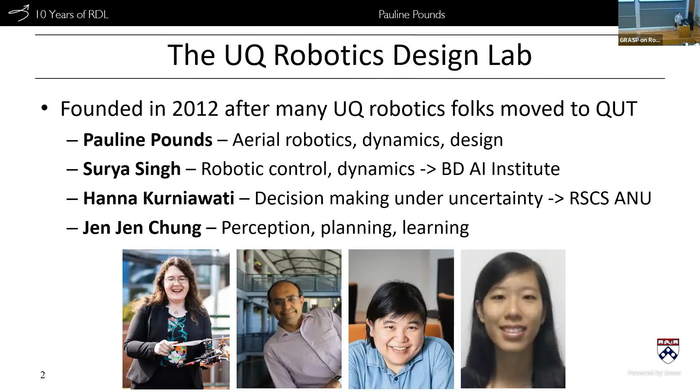So in fact, I'm one of a few people who are members of the UQ Robotics Design Lab. We were founded back in 2012 after a whole bunch of robotics folks left to start a new lab at QUT. And when a great oak falls in the forest, smaller trees may spring up in their place. So Surya Singh and I started our group, and then we added Hanna to our ranks. Surya is doing amazing stuff in robotics control - in fact, he's so amazing he's been poached and he's now at BDAI, gone to the promised land. Hanna has gone on to RSCS at ANU, where her work in decision-making under uncertainty is very much appreciated. And Jen Jen Chung, formerly of ETH Zurich, has just joined us, bringing us back up to something looking like full strength.

So I'm the aerial robotics side of UQ RDL, and we look at practical whole systems approaches towards robotics design. We look at UAVs, sensors, walking machines, industrial applications - lots of different places where we can use our special little set of toolbox. Our toolbox is mechatronics, dynamics, and control, and not CS. So if you're looking for an algorithm, I'm sorry, I can't help you - I'm terrified of anything with an operating system. But if you're interested in dynamics, control, and mechanical systems, oh boy, that's what I'm all about. So here's a little grab bag - some of these you'll see today and other ones will remain conspicuously elusive.

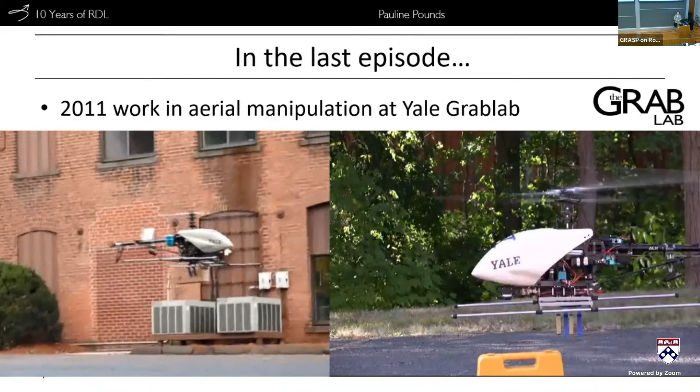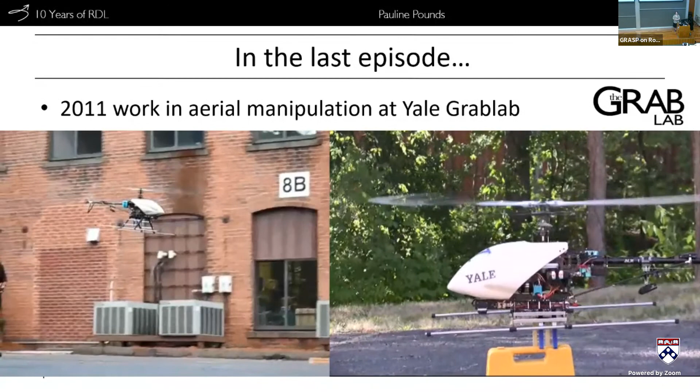So when last I came and visited - this one hasn't quite put the video through properly, I might actually reshare the screen - oh no, it's picked up. So when last I visited Grasp Lab 10 years ago, I was showing off some work we'd done at the similarly named Grab Lab at Yale, where we did some of the foundational work on aerial manipulation. I very much enjoyed this work because it had a clear practical application to underlying theory that relied entirely on clever mechanical interactions rather than on high-speed, very efficient algorithms or the robot thinking too much about what it was doing. This sort of set the pathway for where we went in the future. So if you haven't seen it before, go check it out.

It is kind of cool. The very first object delivered by a hovering drone, by the way, was a can of Guinness. So I think that says a lot about our work in philosophy.

So what do we care about aside from cans of Guinness? Making drones cheaper—we want our drones to be low cost, so cheap that we can even throw them away when we're done with them. We want to make drones better: fly longer, further, carrying heavier payloads, and just generally being more capable.

We want to make our drones safer. We want them to be able to reject wind gusts and perhaps sense obstacles around them—and a brief detour into stopping humans from being cut to ribbons by them as well.

And we want to make dynamical bipeds affordable. This is a new branch for us. It's kind of odd to work on something that doesn't fly, but actually a lot of the principles are very similar. My stratagem is to radically rethink and reframe problems to find electromechanical, what I call stupid or dumb solutions, instead of CS-based smart solutions. Not only because I'm not that great at CS, but because there are many benefits from going for a hardware-centric solution.

They're simpler, they're cheaper, they're faster. In terms of response time, there's no sampling involved. They'll involve fewer parts, and what's not to love? Anything you can do to make your system more practical and employable, the better off you'll be.

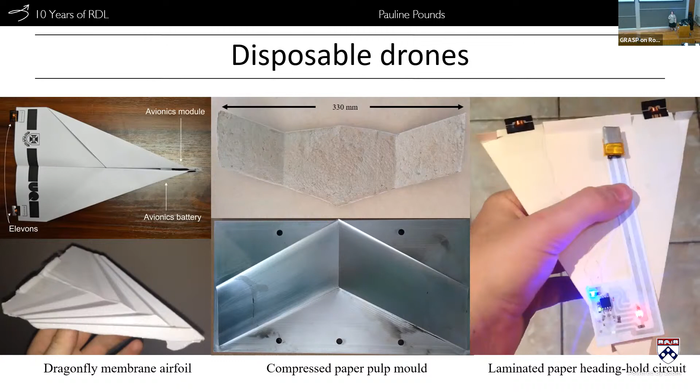But after building these paper planes, and this is sort of about the first couple of months while I was at UQ, I realized, what are they actually good for? And it was around this time that, as it does, Australia caught fire.

You may have noticed the smoke around campus. I have carefully arranged this to act as a counterpoint to this talk, so you could appreciate the challenges faced with trying to actually measure things inside a bushfire and dealing with the consequences of wildfires, for example, up in Canada. It's not enough to have a single drone flying around—a $10,000 drone could be in one place at one time taking one measurement.

Whereas if you can have 10,000 one-dollar drones, they can be everywhere all at once, giving you measurements constantly. So our rationale was, if we can build drones this cheap, maybe we can build drones for bushfire fighting that will actually help save lives and prevent losses of property in circumstances like this.

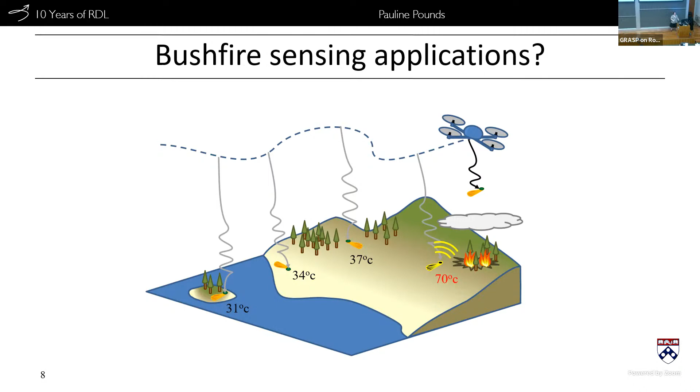So we thought about it and we realized, well, paper's challenging to deal with. Let's roll back a little bit and just go to polyimide. Polyimide is actually a really good material for making disposable drones from. It's light, it's cheap, and it's intrinsically part of the existing circuit manufacturing process. Flexible circuits are inside all of the cell phones, all of the cameras, all the laptops that we have on us every day of the year. We build hundreds, thousands of tons of these annually worldwide.

So if we can build a circuit into it, can we make a circuit act as a wing? We thought, well, what's the simplest wing we can build? And we thought, how about a samara seed? Maple trees grow natively on UQ's campus, so I tripped over one while going to work one day and thought, oh yeah, I'll build one of them.

So we built the system. It's designed to be a one-part UAV, fully automatically assembled by a machine. On board, it has a pressure sensor, humidity sensor, an ambient light sensor, a temperature sensor, as well as a 6-DoF IMU, so you can measure its motions as it falls, and then a radio module on the back.

The trick to making these things small and cheap and highly integrated is to make every part do multiple things. For instance, that leading edge stiffener is also a counterweight, which provides stability of the aircraft as it auto-rotates. It's also connected to a radiating element, which forms part of the antenna for the system. In fact, it has three separate antenna axes, so whichever way it lands, there's always a radiating element pointing up. The radio is on the back of that little circular green part with all the circuits on it.

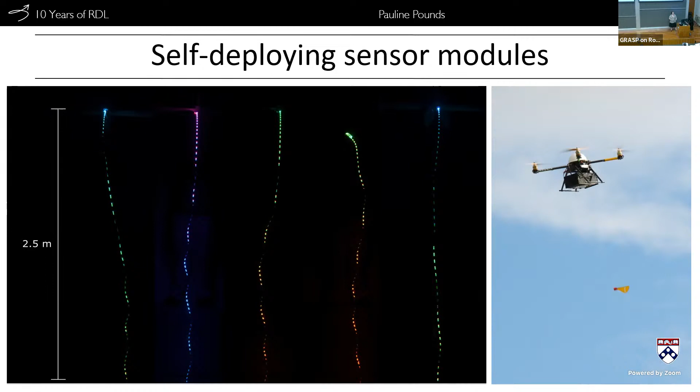Before we actually took it to the field, though, we did a couple of quick tests. If you put glowy lights on it, you can get measurements about how fast you're falling and how fast you're spinning. This told us that we reduced our terminal velocity on hitting the ground from about 16 meters per second to about 5 meters per second, and we spin at about 10 hertz according to our strobes.

Alright, so here's a view from our drone. You can see them flying down. You can optically track them if you know what to look for, and you can build a little system that will cue in on your red colored bits of tape. Sometimes it's a bit hard to see, but on a good day, you can track them all the way from the aircraft to the ground.

That's kind of neat, because if you know where you launch them from and you know where they land, you can calculate what the wind speed is at each point in its descent. One of the problems of building a device that's biomimetic is that when you try to find these things after the experiment, they just look like leaves amongst all the other leaves. So I recommend if you ever replicate work like this, paint them bright pink. You'll save yourself so much suffering.

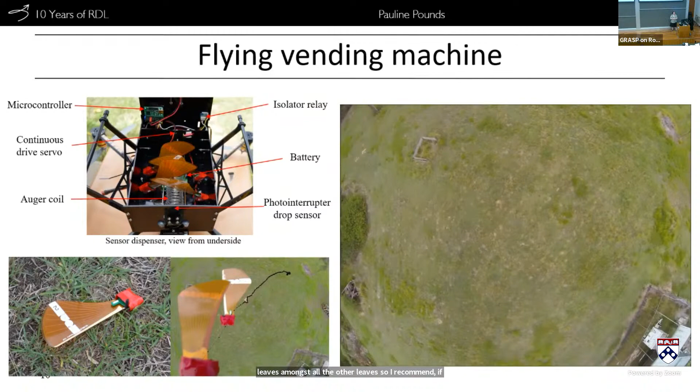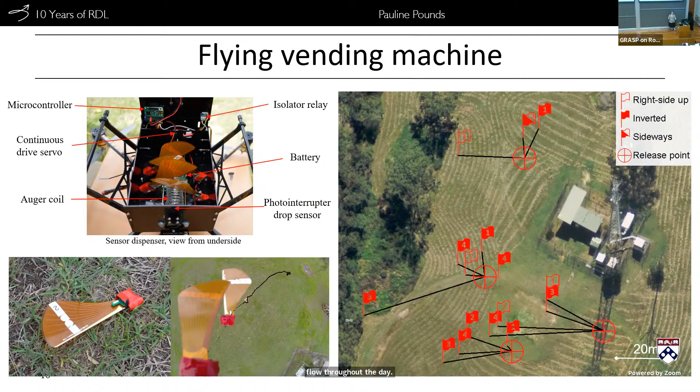Once you do this a whole bunch and collect a bunch of data, you're able to build up things like topographical maps of temperature, topographical maps of pressure, but also changing wind flow throughout the day. This is a subsample of our data showing that when we drop it from 4 different locations, 4 different times in a row, the wind has started to change its track throughout the course of the experiment.

It's not just enough to build something that auto-rotates. If you have an aircraft with onboard sensing, you might as well use it to do something more interesting. Since we have this foldable substrate, and we'd already done experiments with paper airplanes, why don't we extend that to the circuit board environment as well?

So we started folding our circuit boards into 3-dimensional aerodynamic shapes. For this orange one, we just stuck with the delta dart because that's understandable to people who know what that is and what it looks like. But you can do all sorts of interesting things like providing corrugated stiffening, forming airfoil shapes, and integrating your circuitry directly into the structure of the aircraft itself.

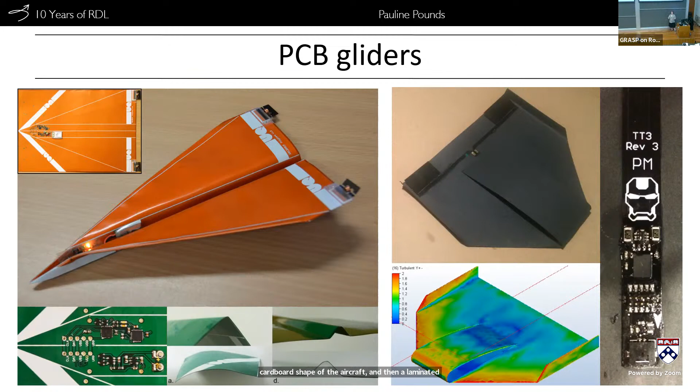Here we've used a combination of these two bits of work, where we have a piece of paper which forms the cardboard shape of the aircraft, and then a laminated circuit out of the polyimide which gets glued on. This combination keeps the cost really low but gives you the best of both worlds.

Where do we want to go with this eventually? If you can launch these from something like a helium balloon, you could get up to 30 kilometers in altitude. And after free falling for about 10 of those kilometers, you get a pretty good clip, so you could fly for quite a long distance with a glider optimized to have a decent glide ratio.

But the problem is, what do you do when you're up there? You have wind, you have potential disturbances. If you have a good enough tropospheric map, we want to build a system that does offline planning, giving our system a series of decoupled wavelet functions that allows it to calculate what the ideal heading would be to take it where it wants to go, no matter where it ends up in its flight path, given an almanac of future weather conditions pre-computed using Bureau of Meteorology data.

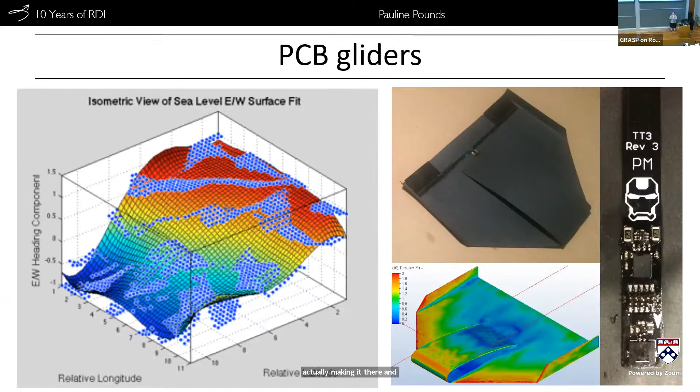This one's still in the works, but it looks promising at this point. The idea is that with very little information encoded into a tiny microcontroller the size of your pinky finger, you'll be able to have something that can navigate long distances with a moderate chance of actually making it there. And even if only one does, they're cheap enough that you could launch swarms of tens of thousands and still carry out your mission.

Okay, so let's move on a little bit to drone performance. We've gone from cheap, let's go to good, or at least better. Can we fly with useful loads for longer and further? How would we go about doing that?

One of the biggest challenges I have as a helicopter aerodynamicist by training is that helicopters are very efficient, but they're hella complex. They have these swash plate mechanisms with all these moving parts that have to be lubricated and assembled correctly, and some guy forgets a washer and suddenly it tears itself apart right in the middle of doing something interesting. It's a bad look.

Drones rule the world today. Quadrotors rule the world because they have 4 moving parts. Once upon a time, people thought they'd be more efficient or more maneuverable, or this or that. No. Actually, they're terrible aircraft compared to helicopters and things like helicopters, but they're so simple. And that really made an impression on me when I realized it.

What I would like to do is build something that is as efficient as a helicopter, but as simple as a drone. How do we go about doing that?

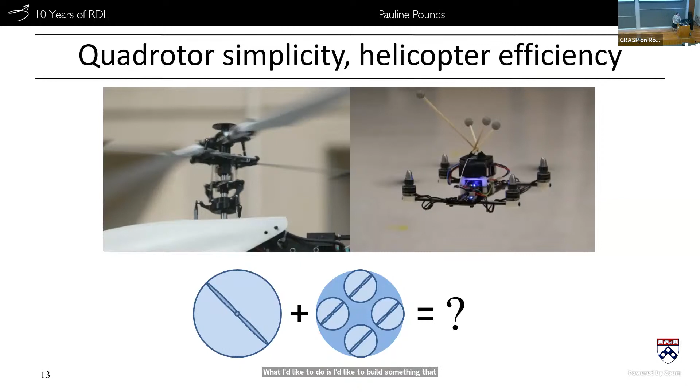Well, we thought, okay, a helicopter has one big spinning thing that provides all the lift, and it's more efficient because it captures a larger cross-section of area and can waft it down more gently than a quadrotor with 4 small thrusters that have to grab air and push it down very quickly to get the same amount of momentum transfer. Because kinetic energy is proportional to velocity squared, you're going to need more power in order to do that.

So if we just have one big rotor, that's great, but how do we get past the swash plate problem? Well, quadrotors use sets of rotors to maneuver by applying direct torque through their thrust, so why don't we do the same thing? We can use a tripod arrangement so that we can provide roll and pitch, and then have another axis with a slight cant to the side, which provides yaw.

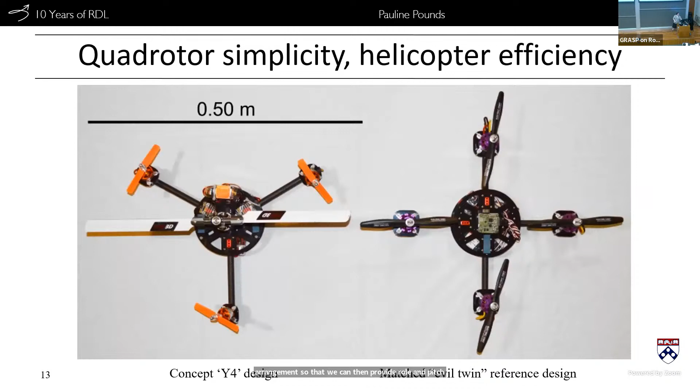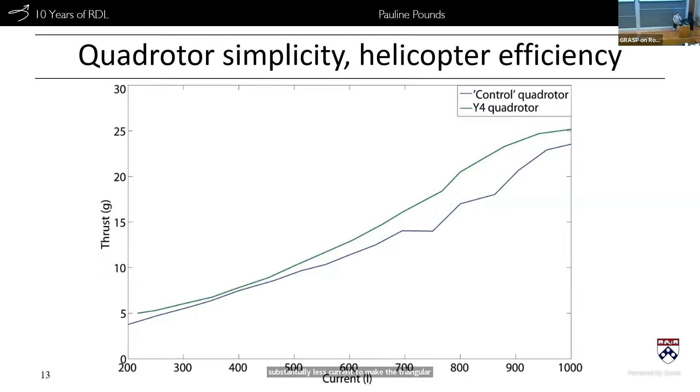If you put these on a thrust cell and just fly them on the ground on a bench, you can see that for the same amount of thrust, you're using substantially less current to make the triangular configuration fly. But on the ground, it doesn't tell you everything. Being able to fly these things is where the proof is in the pudding. And well and truly, we find that we're using about 15% less current on our triangular quadrotor.

This is a quadrotor designed to match its evil twin. It has the same mass, same motor mass fraction, same flight controller, same ESCs, same batteries. Even the rotors on the triangular quadrotor have been tuned to exactly match the efficiencies of the rotors on the regular quadrotor's smaller rotors.

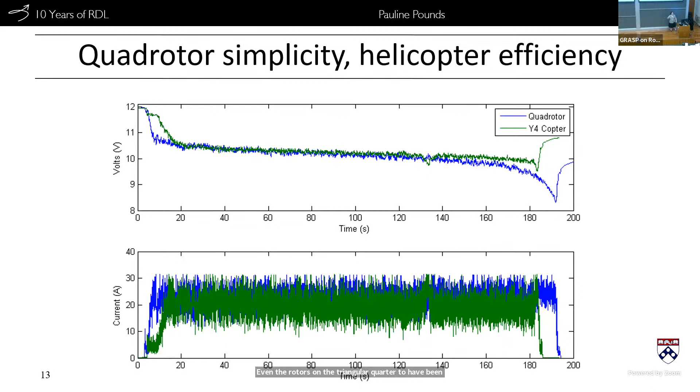So of course, it's not enough to be able to fly. You actually have to be able to control yourself.

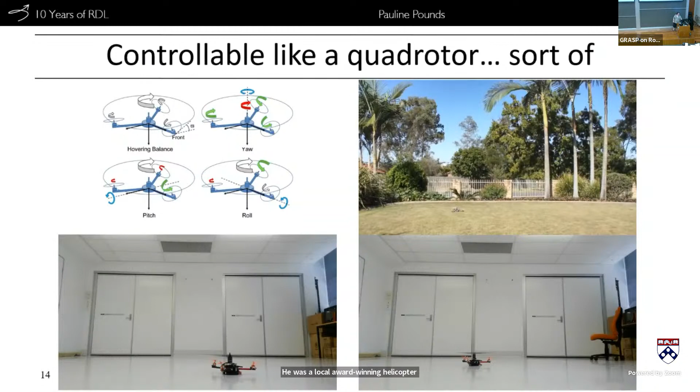This little one here on the top right is our prototype being flown by one of my students who is a champion pilot. He was a local award-winning helicopter pilot, and he had a hard time with it. His flight experience is what he would say was poor, and the flyability was not great. In fact, you can see it's all over the place, and he worked very hard to keep it in the air.

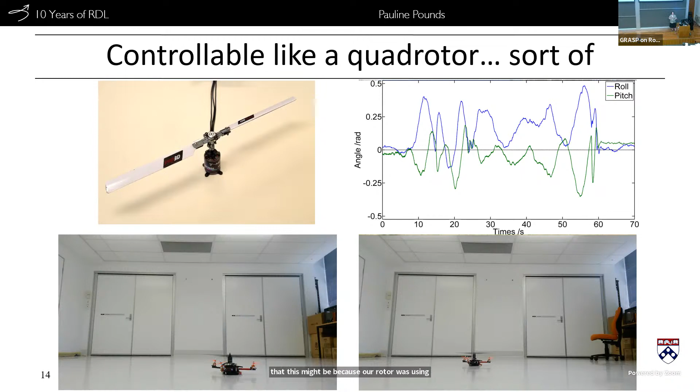We theorized that this might be because our rotor was using off-the-shelf hobby components for small helicopters that were a little bit squishy, a little bit flexible. So we said, okay, let's switch to one that's really rigid, super robust. What does that give us instead?

So here on the bottom left, we have our rigid rotor. We give it a shot, see how we go. No, that's not going to work. But when you look at the plot, that actually made us really excited, because as helicopter aerodynamicists, that has a phase lag and it's purely oscillatorily unstable.

That looks like gyroscopics. And then we realized conventional helicopters have one big rotor with a pivoting hinge in the middle. Conventional drones have pairs of rotors where the gyroscopics balance out. So we figured, if we put in that pivoting hinge that conventional helicopters have to partly decouple the rotor dynamics from their airframe mechanics, maybe that will work for us.

And what we found is that, in fact, yes, that worked quite well. This is the easiest to fly aircraft we have in our entire lab because the gyroscopics now works for you as a stabilizing reference. Even I can fly it with my 2 left thumbs, and we use it for demos for visitors all the time. Very happy with how that one turned out.

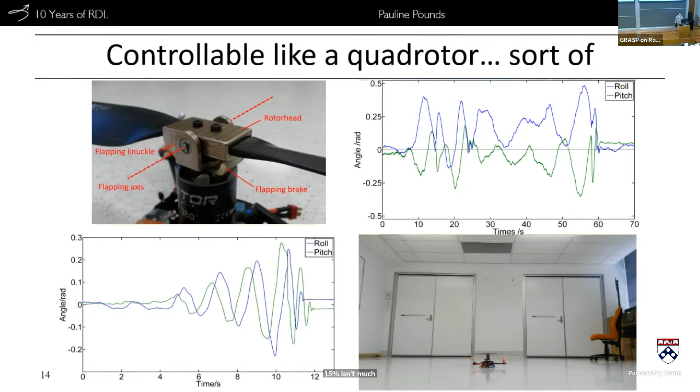But it's not just enough to build something a little bit more efficient. 15% isn't much. That one land, there we go. All right, and that result looked pretty good.

If you can save a little bit of thrust, you can start applying optimizations. With a larger rotor, you have a larger chord length. With a larger chord length, you have a higher Reynolds number. With a higher Reynolds number, you have a higher ratio between the inertial flow energy and the viscous flow energy. That means you get a more efficient airfoil for providing thrust relative to the amount of drag that you're generating.

If you can use lower power as a result of that, you can spin your rotor at a lower speed. If you can spin your rotor at a lower speed, you're reducing your drag and the amount of power you're spending. If you're reducing your overall power more, maybe you can move to a different battery chemistry that has a higher energy density and a bit more fragility, so you can't use it in a conventional drone. And since we've thrown away one of the arms of our rotor, our airframe is lighter, so maybe we can make them very thin, very long, and have very small rotors out at the side just to provide the control moments, because all the lifting's being done by the centralized rotor.

And it gets better and better and better and better. You pack everything under that motor, exactly match the motor to the rotor you're driving, and suddenly it gets better and better and better until you get an outcome of about 43 minutes endurance while still carrying a 200-gram payload. For comparison, at the time we were developing this, the DJI M100 was still being produced, and it was a 2-kilo aircraft with a 200-gram payload, which flew for 33 minutes.

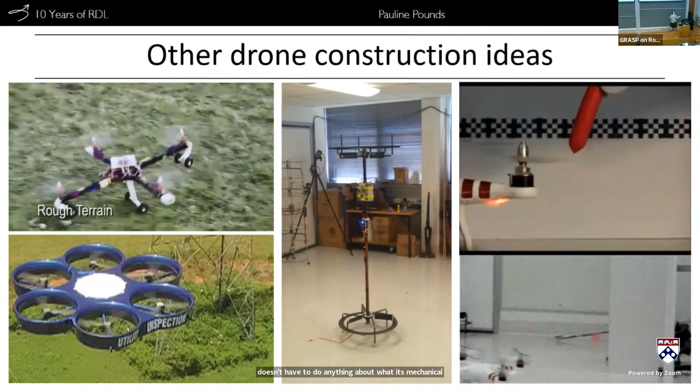But we don't necessarily have to fly everywhere. Alternatively, we could roll. So this little guy here uses what's effectively a skateboard steering arrangement to allow it to scoot along the ground using the same control mixing as what's on board the flight control system. So instead of using roll to move left-right, use roll to turn left and right. The idea behind it was that the flight controller doesn't have to know anything about what its mechanical arrangement is, you bolt it straight on. And it can even handle rough terrain by providing a bit of lift and going to what we call Segway mode, doing a sort of 2-wheel stability across the ground. And of course, it can still fly.

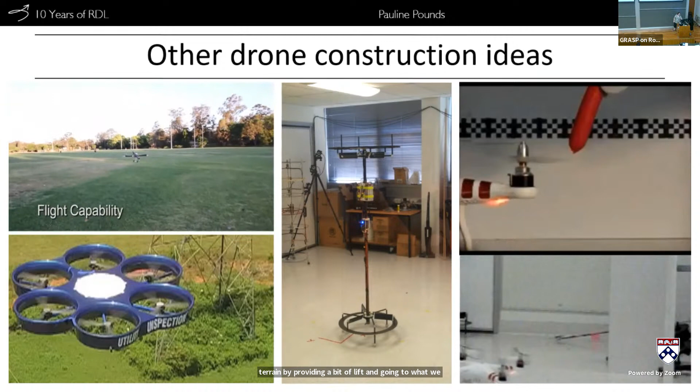At the other end of things, I'm very interested in commercializing some of my work. So I worked with a company called Alaris for a few years to build a truly ginormous aircraft. This is as wide as I am tall. It's absolutely monstrous, 25 kilograms, and carries 5 kilograms fully electric. It's totally ducted. It looks like a rendering, but it's actually real footage. We just shined it within an inch of its life with automotive wax. And we were able to meet all of our design objectives for the aircraft, but unfortunately we didn't get continued funding for it. Each aircraft was $250,000 and could take a rifle bullet through one side and out the other, because we wanted to use it for first responder applications where that kind of thing is expected to happen.

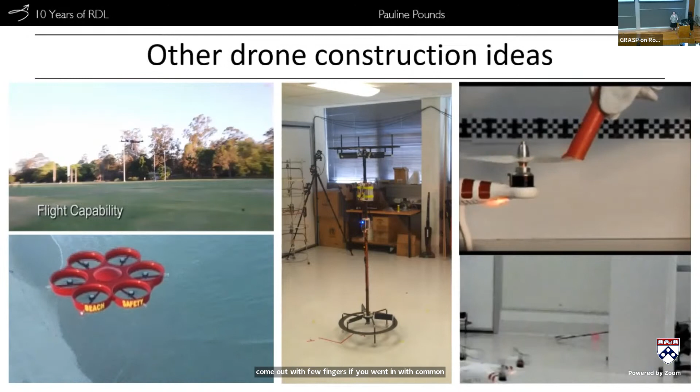Now, have you ever stuck your hand into a high-speed spinning blade of death and come out with fewer fingers than you went in with? Common problem, and unfortunately it disproportionately affects children because people think these drones are toys, when in fact they're real tools with a lot of energy. I apologize for the formatting of this video, this was done by our commercialization guys. But the idea is we have a thin plastic hoop spinning around sympathetically with the rotor, just pulled along by a little bit of friction. This acts as a sensor to detect anything coming into the proximity of the rotor. Before you get to the rotor, you have to pass the hoop. When you touch the hoop, we measure the changing speed of the system, and that allows us to say, hey, someone's about to touch my high-speed rotor. At that point, we're able to use an electrodynamic braking system to bring our rotors from maximum speed to full stop in 0.06 of a second. And you don't have to experience what that hot dog there is going through. From the moment of contact to full stop, you get 4 complete revolutions of the rotor. The idea is it turns an amputation or deep laceration into just a scratch. That's now licensed for being turned into a commercial product.

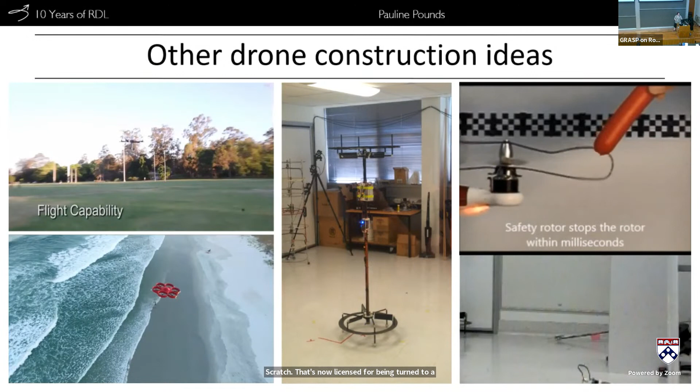All right, so switching gears again, let's talk about gust rejection. If we're flying around urban environments with our cool robots that now fly for a whole bunch longer, how do we avoid things like wind pushing us into obstacles? We don't want to collide with things.

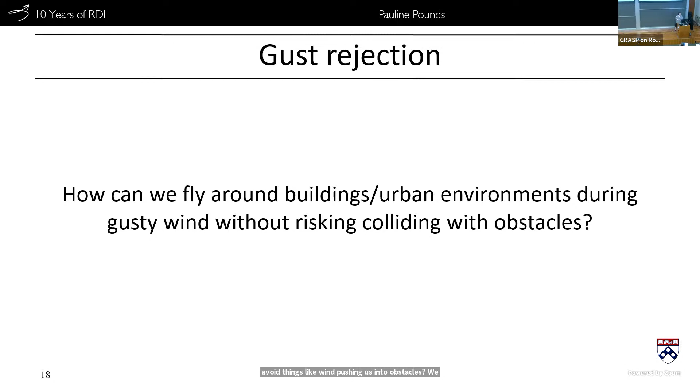We don't want to get pushed off course. So when we react to gusts, the usual way of doing this is to have a really good sensor measuring our position, having some sort of control law based on detailed models of your aircraft aerodynamics, your rigid body dynamics, maybe some measure about the wind itself if you know its nature. And then we apply computed corrections to actuators to bring us back onto the trajectory we want to be taking.

The problem with this is you have to be displaced before you can react to it. You don't actually know you're off course until you're already off course. And you can only be as good as your sensing is. If you have something like GPS, you may not have the spatial or temporal resolution to provide you any degree of security around obstacles. INS, of course, famously drifts, though RTK GPS is a good stopgap, and things like pitot tubes are completely useless at low speeds.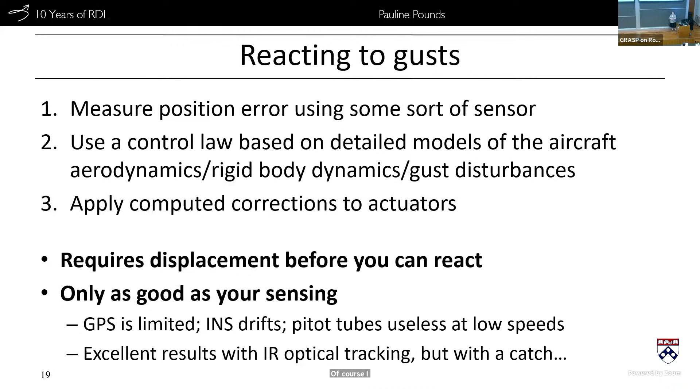Of course, IR optical tracking provides excellent results, and UPenn is very famous for their application of IR optical tracking. So I want to give a quick shout out to that. I call it the pink cheating room because early infrared emitters were picked up by cameras as a big pink glow. And it's great, it's a fantastic system, but it doesn't really work outdoors because it must compete with our old adversary, the sun. I don't know about you, but I'm still formulating my plans to defeat the sun. IR tracking is fast, it's precise, it's flexible. It's not especially cheap, but it's really easy to work with. So it's a great sensor, except we can't use it.

So what do we do instead?

Well, how about we use the aerodynamics we already have? We know that if we're flying, we must have air to work with. So if we use wind over the rotor blade moving towards the oncoming wind, which increases the amount of lift and drag, and then we use the wind across the retreating blade, which is moving away from the oncoming wind and produces less lift and less drag, to produce a total net force that we can then measure, maybe we can use that as a sensor because that's linearly connected to our drag thrust through our velocity and also our pitch velocity, but that's a more subtle point.

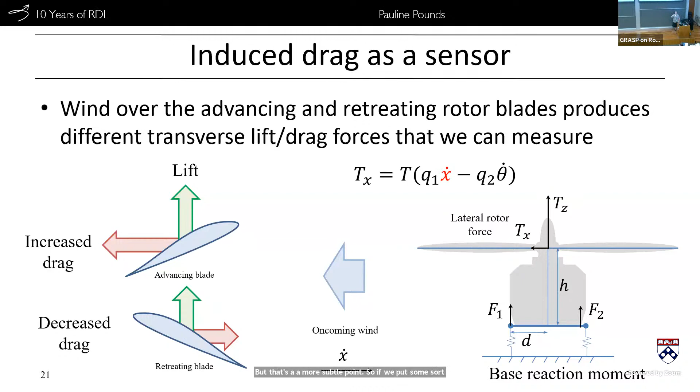So if we put some sort of sensor beneath our motor, we can measure that changing thrust force at the end of our blades and use it as an input.

To build something that looks a little bit like this, we shamelessly ripped off Rob Howe's work on embedded pressure sensors in polyurethane material. Rob knows what we're doing and approves. We thought it was a great approach because it's very compact, it's very lightweight, and it's very precise—all things you want when measuring thrust on a drone. It sits between the airframe and the motor, and it's surprisingly good as a sensor.

So here we have it rigged up on a lever beam with one end having our JR3 load cell, and then the other end has our force sensor with a water load being poured into it at the end. The ratio between our rotor displacement and our lever arm are designed so that the overall magnitude of torques being measured by our two load cells should be the same. And in fact, they track so spot on, we thought we made a mistake at the start. But you can actually see the JR3 is able to pick up a couple more high frequency characteristics in there, probably because of us pouring water in as we go.

So stick a rotor on it and throw it on a swing arm. The swing arm provides us an easy source of repeatable velocity in a lab with limited size. At 0.53 meters per second, you can see we get a very clear signal on the green one there, and the cross-flow sensor picks up basically nothing. Though they're not scaled the same, the force being measured through the vertical thrust is the one there in red. So when you turn on your thruster, you can see you start developing some thrust, and then you get this component as the swinging begins to turn on.

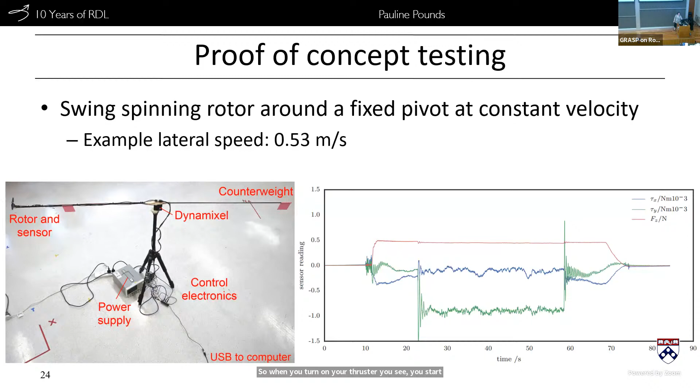And it's really precise. We can actually use it to detect the ambient airflow due to air conditioning. So we got these weird periodic oscillations as we had our swing arm going around in circles. We couldn't figure out what they were. And then it occurred to us that they always happened when we were heading in one particular direction. No matter how we oriented the assembly, that bulge always occurred in one direction. And one day, the air conditioning wasn't on, and we didn't have it anymore.

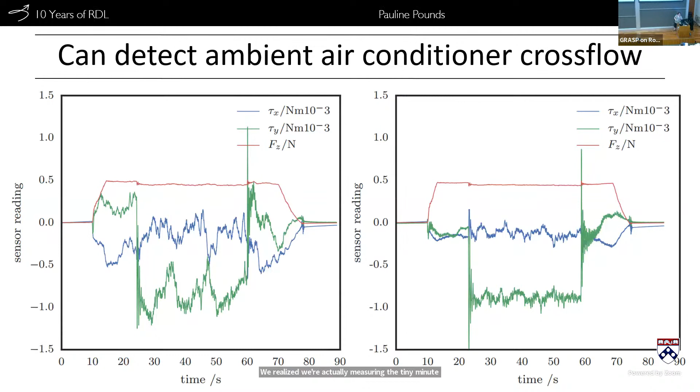We realized we're actually measuring the tiny, minute amount of crossflow through the lab because of the air conditioning system. So, okay, that's cool. What if we put it on an aircraft now? It's not enough to just have force torque measurements.

We actually want to turn that into something that gives us the drift velocity of our aircraft. So if you have force sensors on each of our little motors, you can decompose that to a triple of force in each direction. You can then put that through a 12x6 matrix and do the pseudo inversion, and that gives you out a velocity vector at the end, depending on all of your sensor inputs.

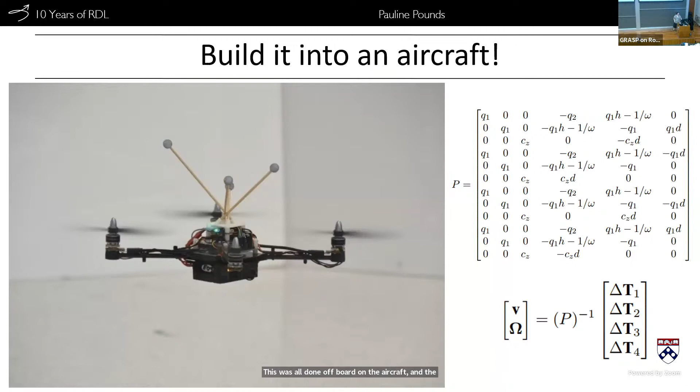This wasn't something we tried to do on board the aircraft. This was all done off board on the aircraft, and the version you see here was just streaming it all to an off-board computer to keep the computation load low. But it worked very well.

What we found is that our velocity estimates relative to what our OptiTrack system was giving us was pretty much spot on. You can see here we're flying in a circle. You've got the dx and the dy components on left and right there. The blue track is the one that we're estimating, and the black one is what our ground truth is telling us.

And during the flight maneuvers, it looks pretty good. In fact, the only deviation there is when it's taking off and when it's landing, where ground effect is coming into play.

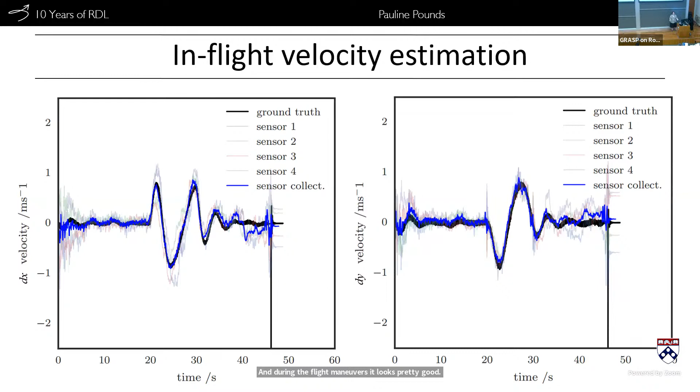If we have it do a more dynamic maneuver where we start doing a tick-tock back and forth, we get a little bit more of an excursion there because our rotor model doesn't take into account some of those higher order effects. But if you look at the overall linearity between the overall ground truth velocity versus the estimated velocity, it's really nice and linear with one single data point hanging out in space, which we think was just a communications error.

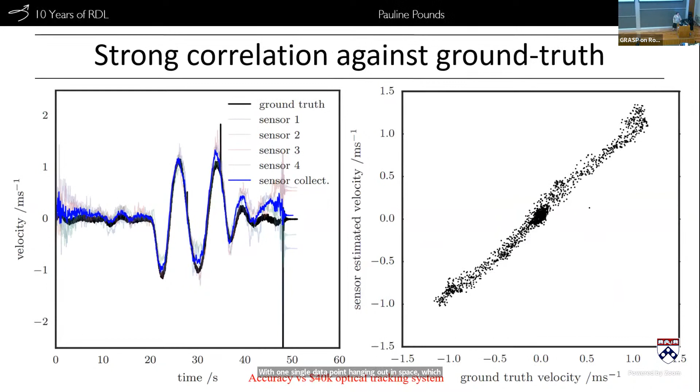So if we can make them small enough to fit under a drone rotor, can we go further? We would actually like a pure aerodynamic sensor without having to have a rotor on it. What if we build a bunch of whiskers?

And so we took the same principle. Instead of having 4 sensors on a platen, we could get up to 12 sensors as sets of 3 each. And on top of that, we put a little piece of laser cut flexible acrylic, and then we put a dab of, I believe it's ABS, which we then extruded in like a taffy pull to produce a minute little whisker. And these little guys are quite small. They're about 1 inch across the diagonal there.

But you can see that even when the whiskers are removed from the display, they'll ring a little bit, measuring their own mass as they go. There they go, direction and magnitude. And we can have arrays of up to 250 something of these as part of a USB network.

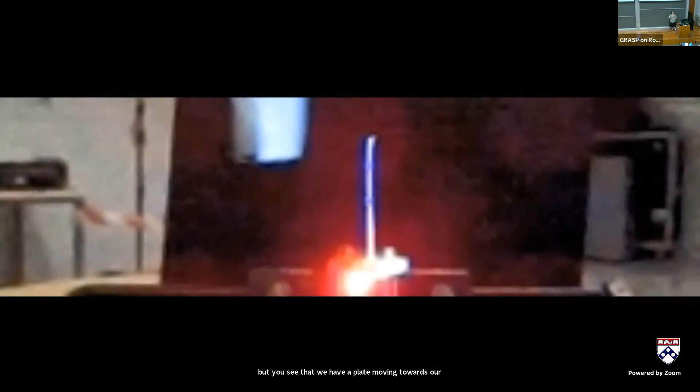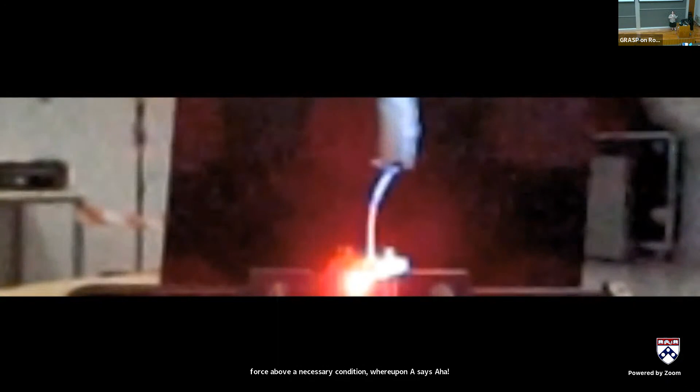So it's a little bit hard to parse what's going on here. But you see that we have a plate moving towards our sensor, and then at some point the red light comes on. That red light comes on when it senses a threshold of force above a necessary condition, whereupon it says, aha, something is approaching my whisker. And we're actually measuring here the bow wave of air being pushed ahead of this hand-sized plate of paper coming towards our sensors.

In fact, we can measure forces down to 3.3 micronewtons in size. That's about the weight of a flea. So very, very sensitive.

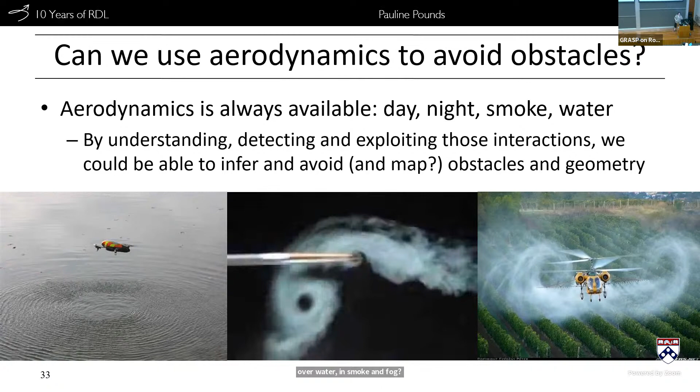Since we realized we can actually measure the effect of aerodynamic flow around an aircraft without even touching it, without having to touch the environment, we could get some reciprocal pressure field we can deal with. We realized, why don't we turn that into a sensor for an aircraft navigating? Aerodynamics is always available. Day, night, over land, over water, in smoke, in fog, it doesn't matter. If you can fly, it's there. So by understanding these effects, we could build a system that might allow our drone to not require any other sensors.

So this was an attempt to build an aircraft which had a ground effect system. A set of shaped channels would allow the rotor outflow of two slightly canted motors to interact in such a way that it produced a restoring torque back to the middle.

What's the correct combination of angles and sloped plates? I don't know. But let's do an exhaustive search across all the possible angles it could be. And what we found out is that it's pretty clear the higher angles you have, the more restoring torque you get. Here on the right-hand side, you see the red ones are the ones where the drone flopped around and escaped, and the blue ones are the ones where it settled down into some sort of stable equilibrium.

And we could tell that actually, yes, there was some sense to this. These interactions could be strong enough to stabilize our aircraft.

But we learned early on that, in fact, we needed to make sure that the control on that aircraft is very, very clean. Even the effect of changing the velocity of the rotors would be affecting the amount of voltage on the rest of the battery, which then changed the dynamics of the rest of the aircraft. So we actually regulated the entire power supply for this aircraft, all the motors, all the controls, every electronic system fully regulated to have just a few millivolts worth of ripple. So everything was extremely clean as a power system.

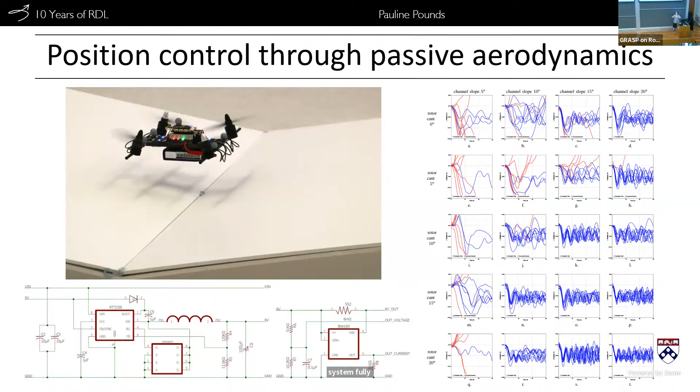And this let us do a really interesting thing. If we take our drone and set it to about 95% hover thrust and just drop it, it descends down, touches the ground, maybe doesn't touch the ground, comes into ground effect, and bounces until it reaches some equilibrium altitude where the effective ground effect is enough to compensate for the reduction in thrust necessary for it to fly. And it reaches this beautiful equilibrium.

And here in black, in this top left, we've actually mapped out what our simulated result was, and our blue results match pretty well.

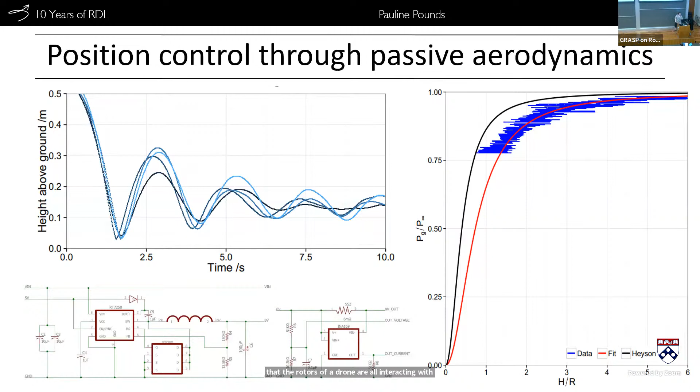Alrighty. So taking all of these things that we've done and then glomming them together is one of our current pieces of work. We've got an aircraft now which implements what we call an electronic force controller. The electronic force controller is not controlling speed of our rotors, but actually the force being generated through a fast feedback control loop at about 1 kilohertz.

We can measure the amount of thrust being generated in real time, turn that around, put it through our aerodynamic models, and then produce an output control.

Each of our EFCs is basically a flight controller unto itself. Each one has its own IMU, and they talk to each other through a daisy chain to minimize any sort of bottlenecks in their communication. So it's a lot of processing on board to do this aerodynamic mapping, modeling, and disturbance rejection process.

Each of these can each take 2 additional whisker boards so that we can measure the ambient flow field around the aircraft and then measure the changing aerodynamic model as the aircraft approaches something like an obstacle.

This one's reasonably recent work. I'll just throw that in to show that, yes, even if it's got changing loads in aerodynamic environments, it can regulate its speed to maintain the same thrust. Let's move on past that.

If we want to fly close to obstacles and respond accordingly, we need to know what flying close to an obstacle looks like to one of our sensors. So we built a rig which allows us to fly close towards an approximation of a wall or a corner, with ground or ceiling effect. By setting this up as an autonomous system, we could log a stupid amount of data points over a long period of time and let the algorithm crunch it for us.

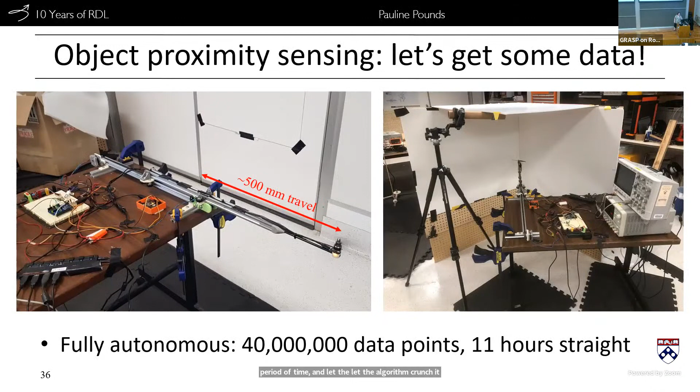It's about 500 millimeters of travel there. If we map what's being measured by each of our sensors against its position away from the wall, we get some curves which are pretty instructive, I think. If we have the free air case, where we just translate our rotors without being close to anything, we would expect to see something roughly constant, and that's what we get.

If we come close to a wall, we see that we get a small amount of changing flow. This is because as the rotor approaches a wall, some of the air being sucked in above and pushed out below has nowhere to go, blocked by the wall. So it just sucks itself back in again. You get a recirculation effect.

As a consequence of this, the rotor believes it's producing less thrust on this side and moving in the opposite direction from what the wall is actually doing. If you exacerbate that with a corner effect, the effect gets stronger, because now you're blocking that rotor on multiple sides, so it becomes more pronounced.

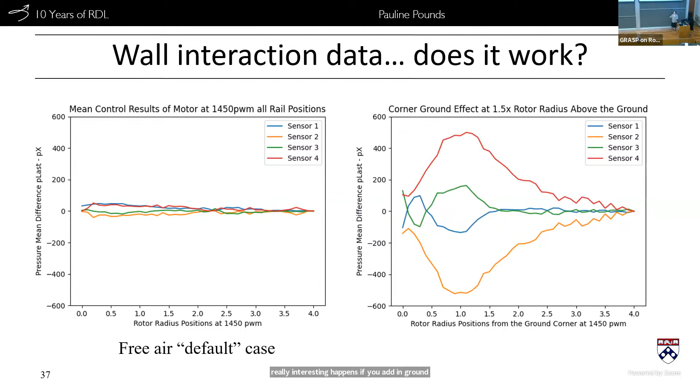But something really interesting happens if you add in ground effect. Suddenly you go through this period where it's getting worse and worse and worse, and then it gets more normal again. That's strange. What's up with that? And I got to tell you, I just don't know. We're trying to understand it still.

But the important thing is what's happening in this part of the curve. You can see that for all of these conditions, you always have a widening away of the sensors, indicating a divergence from what your anticipated flying conditions should look like. So we can use that as a signal to drive our system away from obstacles. Where we want to go with it is to have a system whereby we can navigate blind through a smoke-filled room, using nothing but our rotors to keep us from crashing into anything.

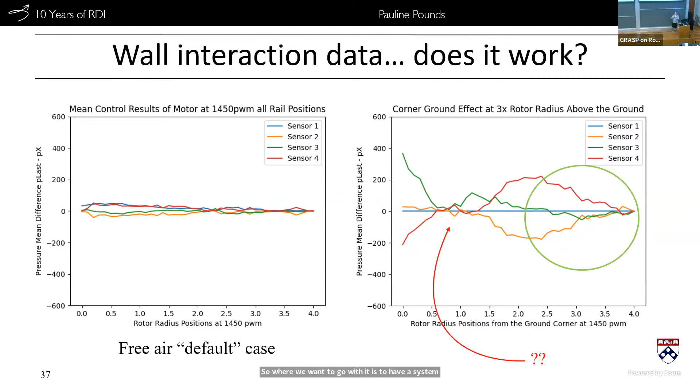All right, just to finish out, I want to talk about something completely different. But when I say it's completely different, it's similar, but not quite the same. So I want to quickly talk about 2-legged walking machines. Anyone who knows me knows I got into robotics because I wanted to build giant war machines to crush the cars of my enemies. I'm not even kidding about that. I think that's written on my business cards.

Walking robots are challenging to build. They require extensive modeling, estimation of ground contact mechanics, expensive sensors and actuators, and all of this adds up to be very expensive. Things like Boston Dynamics robots are amazing. I can't afford one. Maybe you guys can. I can't. And we do all of this hard work just to stop the thing from falling down.

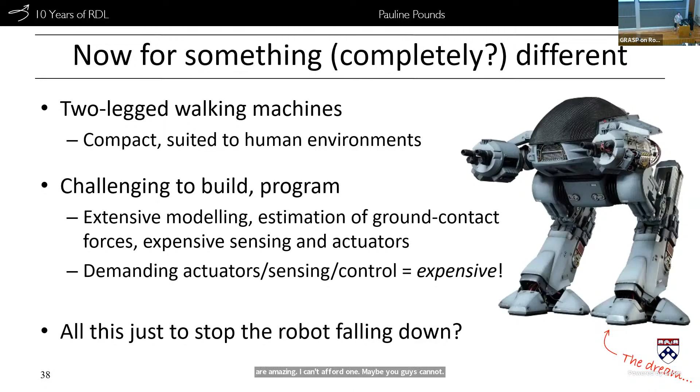But I'm a helicopter person. That's my background, my experience. And helicopters control themselves — they don't fall down. They use this rotor, which generates forces and torques to keep them in the air, and they're able to avoid aerodynamic disturbances pretty well. So what if instead we treat our robot as if it's a helicopter, with disturbances coming in through its feet now, and some sort of force-torque generating system to keep them upright?

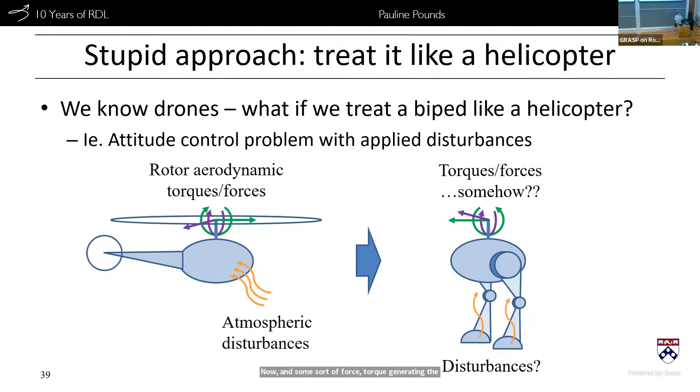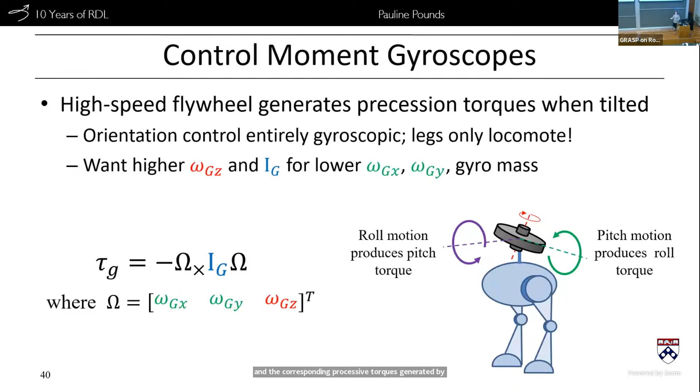How are we going to do this? Well, we're using a technique called control moment gyroscopes. Unlike a reaction wheel, where you just accelerate or decelerate the wheel to get a resultant torque, we have a high-speed spinning wheel which we then tilt. The corresponding precessive torques generated by tilting that wheel provide a 90 degrees phase-shifted resultant torque that you can work with, and we can use it as an actuator.

So if we build one based on our basic knowledge of second order dynamics and control, run through the math — how much space, how much weight, how much things you're going to have — about 10% of the mass of the vehicle is put across to the flywheel.

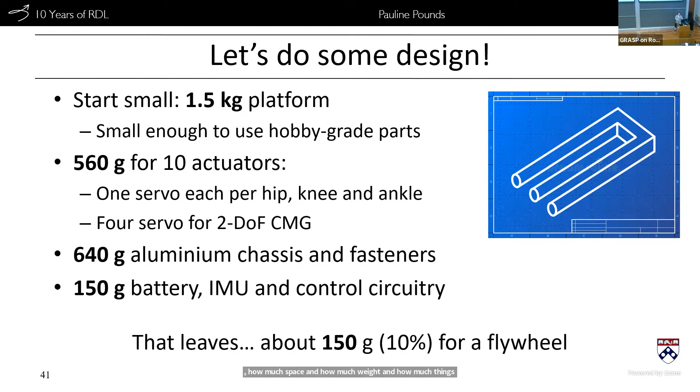Let's see if we can make it work. You get something that looks a little bit like this. It's about the size of a chicken. We call it the tiny giant robot because we want to build a giant robot, but our budget doesn't extend to that. It's about 4,240 Australian dollars for a dynamical biped. In freedom units, that's just under 3,000 US dollars.

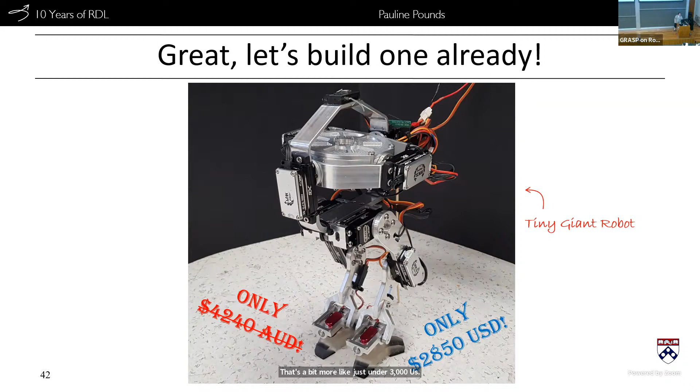So what's under the hood? Well, we have the flywheel as spoken about before, but the feet, the ankles are completely floppy. There's no reaction torque between the ground and the rest of the robot. The flywheel's responsible for doing all of the balancing. And because it's so cheap, we're just using off-the-shelf hobby servos.

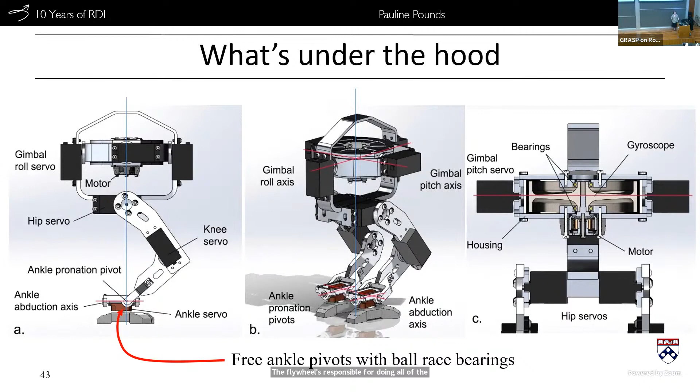So how does it walk? Well, it basically puts one foot in front of the other, with all the orientation control being done by the CMG. We just compensate for the fact that the center of mass is moving with respect to the ground contact. And to turn, we just apply a small angle to the feet as it rotates during the single leg stance phase, and that allows it to change its heading.

So the dynamical model is really straightforward. Second order dynamical system, PD control should be good enough. Bearing in mind, we have those forces coming in through the leg contacts that we can compensate for by basically doing a feed forward compensation.

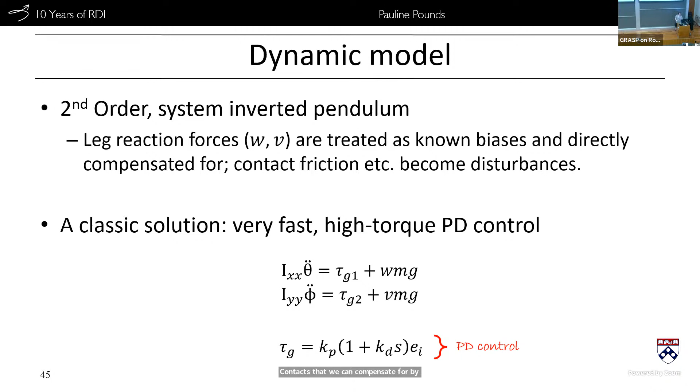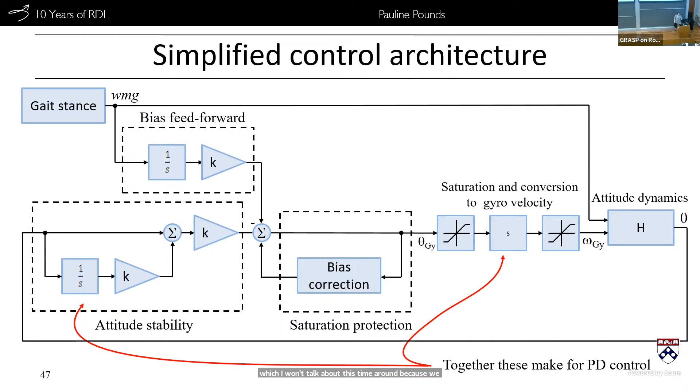So of course, we're good at kinematics. Kinematics is straightforward. We can calculate it as a whole bunch of basic trigonometry and feed it into our control system. The control architecture looks a little bit like this, with a fuzzy box called bias correction, which I won't talk about this time around because we don't have enough time. Suffice it to say, it's one of the more squirrely parts of making these work.

All right, simulation. Simulation says it should function. It has a neat little effect where, because of the way that our bias compensation goes, if you pick up one leg, it tries to balance itself over its singular ankle.

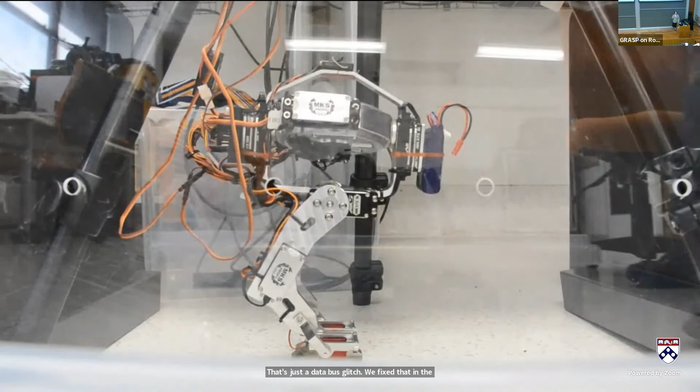And it looks like this when you build one in practice. So here it's wobbling around. It has a little glitch sometime around now where the communications system thinks it is instantaneously 45 degrees away from where it actually is. That's just a data bus glitch, which we fixed in the future. But even with that small error, it's able to reject that effect and keep balancing quite happily.

Fast forward a little bit after we've fine-tuned it. Now it doesn't shake quite as much as a startled chihuahua. We now have a system where it can balance. We can apply loads to it, and it doesn't know anything about the nature of the loads being applied.

And for a vehicle of this size, a 9-volt battery is pretty significant. We can change the ground underneath it, and again, it doesn't know anything about it. Ground angle doesn't matter. And we can even do neat things like shaking the ground to emulate an earthquake, and it just responds sensibly. It doesn't care. It's great.

Of course, standing still is not especially useful. So we then have it doing in-place foot switching, and you can see here, it'll then shuffle forward a little bit slowly. Now, the reason why we don't move more quickly is because we found there was a design flaw with this version of the robot where the center of mass of the feet below the ankle pivots was too low. And so as it moved its leg forward, its foot would rock back. It would get caught under its own feet if we didn't have some way of preventing that.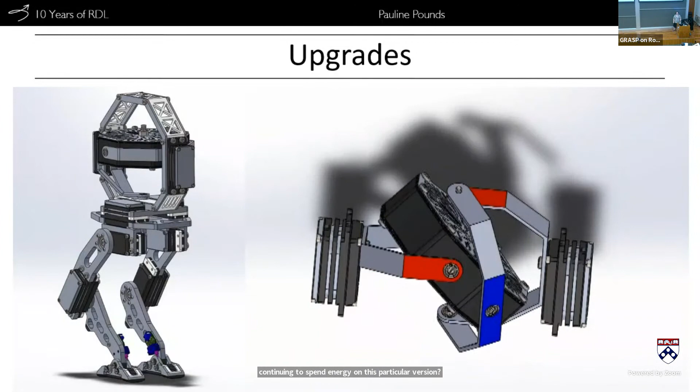All right. So where are we going in the future? Rather than continuing to spend energy on this particular version, we put him in a museum, and now we're working on TGR2. TGR2 has a very different torso structure to be more compact, using a 5-bar spherical linkage. If you know anything about spherical linkages, I recommend you never ever attempt to do this. It is a source of unending nightmares.

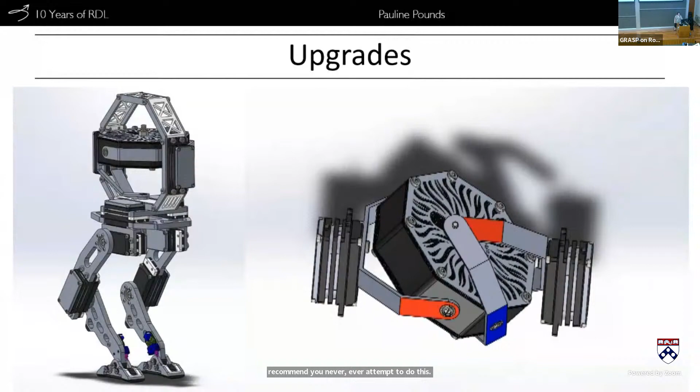But you can't beat the price. It's now less than 2,000 Australian dollars, which is about 1,350 freedom units, which I think is pretty good.

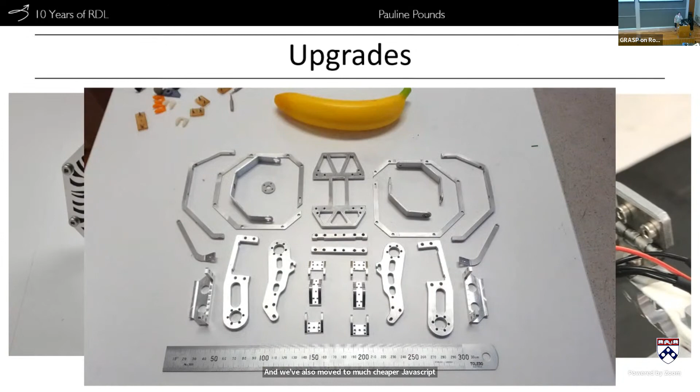We've moved away from our aluminium enclosure with a steel safety band because this thing has the energy of a rifle bullet inside of it. And we've also moved to a much cheaper gyroscope structure. So I'm well and truly over time, so I'll stop showing you more of these things, but it should look a bit like that when it's finally assembled.

Okay, so where to from here? A couple of minor upgrades to be done, demonstrate walking, cliff detection, all the sorts of things you do with a walking robot, and hopefully in time building a less tiny giant robot.

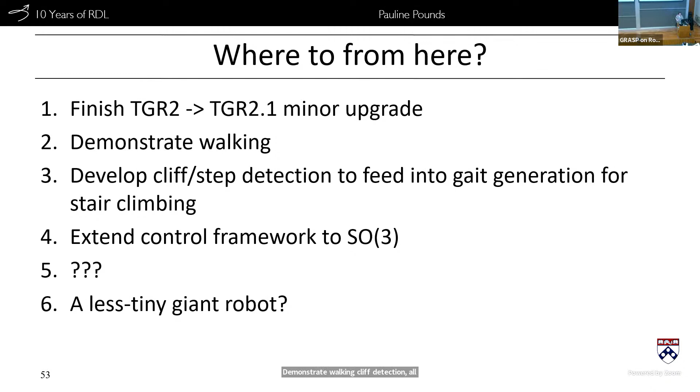Other stuff going on in our lab, we are looking at rotor arrays for flow entrainment efficiencies. We're building virtual reality peripherals to allow you unrestrained walking inside a closed environment, building quadrupeds using dynamic deep reinforcement learning, measuring the depth of boreholes. We have the world's most precise borehole depth measurement system, doing stuff for historical robot recreation, because Hero of Alexandria built robots once. We're building them too, and many, many other things.

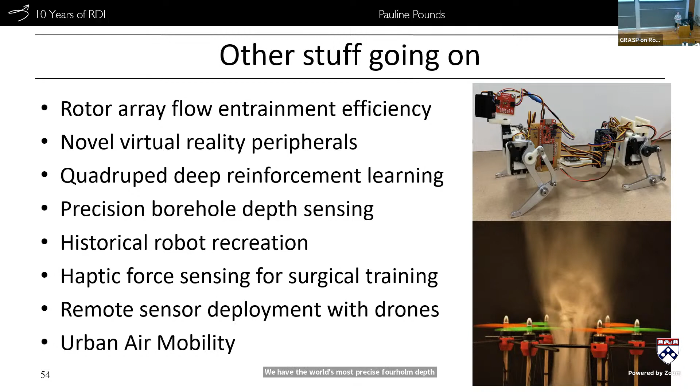So quick shout out to all the people who've made this happen. It doesn't occur in a vacuum. I have a small stable of highly skilled, highly qualified academics and technical staff who make it all possible. We're a very small lab, all things considered, especially when you consider the breadth of what we do. But I'm very blessed to have the contributions of so many talented people. And with that, thank you.

All right, that's fantastic. We've got our two panelists, Spencer or Fernando, who's gonna go?

Yeah, I'll go first. Yeah, so this was a fantastic talk. I love when people present hardware. I think that's very exciting videos. So this question might be a little surprising. What do you think the role of simulation is in your work? Because you consider very complex phenomena, especially aerodynamic phenomena. So how do you use simulation in your work?

This is an excellent question. Simulation, like controls, like algorithms, like a screwdriver, is a type of tool. And the question is, what do you hope to get out of that simulation? I have gone at times right down the rabbit hole of building very sophisticated simulators. And other times I've done a first order thing just to make sure the time constant was correct. In both cases, I learned something useful from that.

I had a paper recently rejected because we were using tertiary aerodynamic effects through vortex interactions in a rotor array to try to get small amounts of efficiency out. And the reviewer said, why haven't you simulated this? And the answer was, because to simulate it effectively, you will lose the fidelity. You only get what you know should exist in your simulation, unless you're able to capture the full depth of it. Something like CFD, if you don't construct it properly, you don't know if you're getting something real. You might get something that shouldn't be there, or you might not get something that it says should be. And even worse, when we complained about this, the reviewer said, well, why don't you have a closed form analytical solution? And the answer is because I can't solve the Navier-Stokes equations. And if I could, I wouldn't be submitting to your journal.

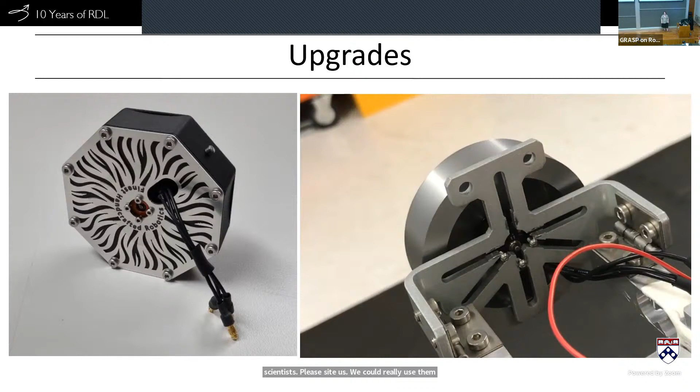So I'm curious about the wind sensing. Can you sense a differential, like instead of a pure flow going all the way across the vehicle, if you've got some type of other more weird flow, are you able to sense that, and have you done that? And what use would that be?

Yeah, so each of our independent whisking elements is its own sensor, so that little array of 4 gives you 4 independent measurements. If you have a difference on one side of the board from the other, you'll pick that up as a changing magnitude or changing angle. If you built a big array of them, you'd pick that up easily. We haven't done much with that because we've been saving it until we've got the aircraft-type platform working, where we can do more applied stuff that's easier to justify to the funding agency. But we would love to just build 100 of these sensors, cover a surface, and blow wind across it to see what happens. I think that'd be super cool. It makes certain aerodynamic measurements and experiments way simpler, but nothing stops us from doing that.

We had a bit of interest from petroleum at one point, who wanted to put them in tubes to measure multi-phase flow, combinations of fluid and gas bubbles, and asked if we could detect that, and we were very confident that we could. We've also tested it in water, and it worked just amazing, and there's a consumer product coming through the pipeline on that one.

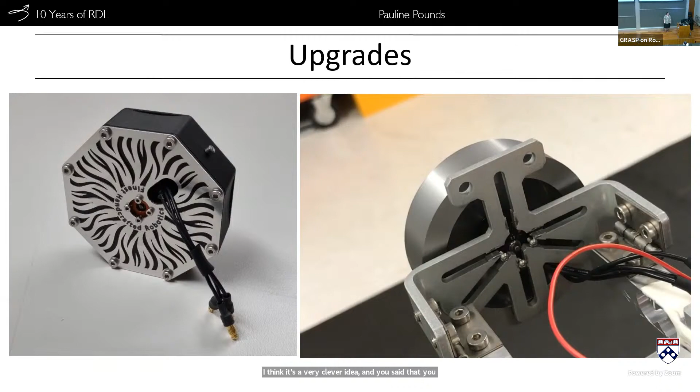I have a particular question for the EKF. I think it's a very clever idea, and you said that you have the different models interconnected to send information between them. I wonder what frequencies they're using, and how are you rejecting the coupled effects in between them?

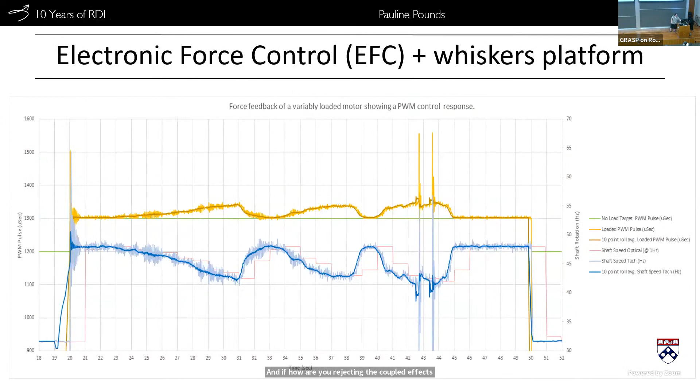So when you say the frequencies they're using, can you elaborate which frequencies? Yeah, so you mentioned that the controllers themselves are working at a kilohertz rate - is this communication between the modules working at the same frequency, or is it like a cascade controller? No, they run slightly slower, and the reason they run slightly slower is because we're limited by the speed at which we're getting, or frequency I should say, the frequency at which we're getting our IMU measurements.

So we have a 400 hertz IMU, a kilohertz rotor force measurement. We control our rotor at a kilohertz, but we communicate to all other platforms at 400 hertz because that's the speed of the slowest sensor we have. They all talk together at that speed through a link, I think actually a 12 megabit link between them all. They're able to update each of their measurements very quickly through a little algorithm we put together to minimize the amount of data transfer, because bottlenecks of these systems are what kill you. So they're each able to make their own independent decisions based on the most up-to-date measurements they have at each point in time.

Yeah, it's technically a multi-frequency control thing, but practically the dynamics are not so fast that it makes a difference.

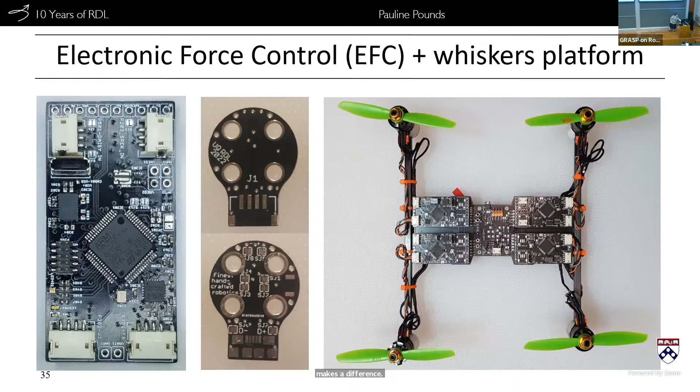I'd like to go back to the whiskers. Sure. So my question is, have you thought about how you're going to place them on the UAV to minimize the effect of the rotors on those measurements, since they are so sensitive?

I got to be honest, this is one that still keeps me up at night. I mean, that and memories of high school, but my plan is to have little stalks with our whiskers sticking out at the end, but there's a couple of different things we want to measure. We want to measure the far flow field, we want to measure the close flow field. So having a couple directly on top of the drone and directly underneath the drone is also in scope. We haven't fully hashed that out because we're trying to get the hardware to work still to integrate everything.

Once we have that, then we'll have a bit of a think about what the natural places to put these sensors are. We have an algorithm we've developed which is able to take arbitrary position placements on a sphere and then map what the expected flow mechanics would be in terms of sensor value displacements. So it doesn't matter in terms of the analytics happening under the hood where we stick them, as long as we localize them correctly within our model and then feed the equations back in reverse, we should have something useful pop out. But the key thing is some places will be more exposed to noise, vibration, or ambient flow field generated by the rotors. We actually want to get away from those as much as possible. But there may be benefit in being able to detect what that flow field looks like as an independent observer of what the rotor thinks is happening.

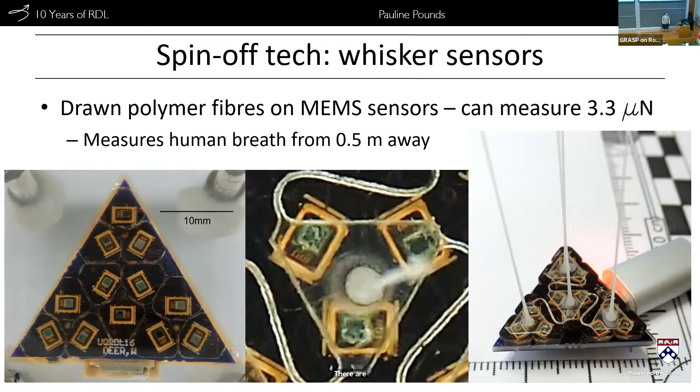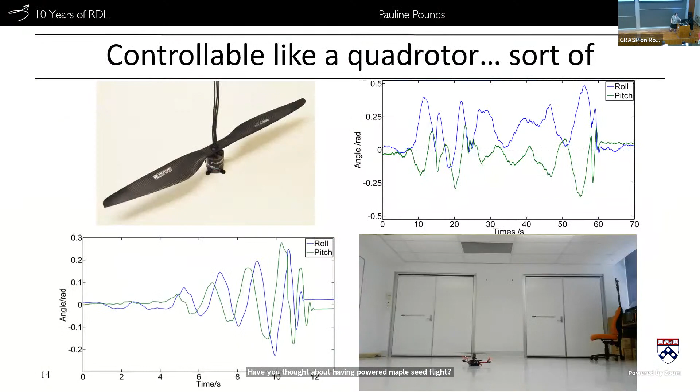The Samara one, have you thought about having powered maple seed flight? Oh, we've definitely thought about it. And so has everyone else, which sort of disincentivizes us from doing it a little bit. We are avowed neophiles of a sort, we're very interested in something new. And as soon as somebody else does it, sort of the joy goes away to a degree. We have definitely thought about it, though.

We've considered in a couple of different ways, applying pulsed thrust to provide some sort of cyclic equivalent control, applying direct counter torque so that the whole thing just sort of swirls up, basically using it as a mixer rather than as a thruster. But if you're going to do that, you might as well generate direct thrust upwards as well. Having articulated cyclic control in terms of a servo tab or something like that, really the possibilities are endless. There's one I saw recently where they had a vertical thruster off axis and used a similar mixer concept, but instead having a component which would always generate a pitching torque, which gave it a higher coning angle. I don't know what the use of that was, but it was cool.

Because there's this big space where people have been searching it out, we're not interested in the dynamics of Samaras. That's been done, I think there's a Nature paper on it out there now. We're interested in making them cheap, and this is just a mechanism to allow us to build a one-part UAV. I have plans for something similar, but it looks nothing like a Samara, though it would work very similarly. But you'll have to wait.